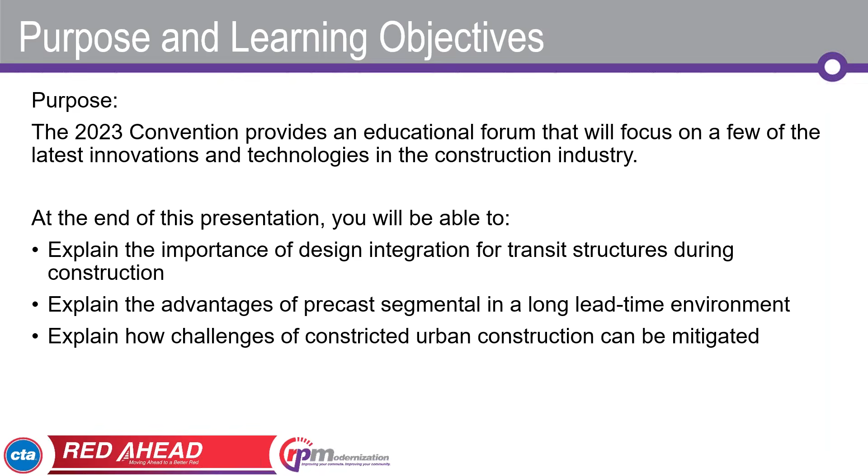A couple of general purpose ones. The purpose and learning objectives here as part of our CEP: design integration, advantages of precast segmental, and the challenges in a constricted urban environment. So keep that in mind. The next slide is just our CEP slide. And we're going to start with just a project overview, give you a little bit of context of what we're talking about and where.

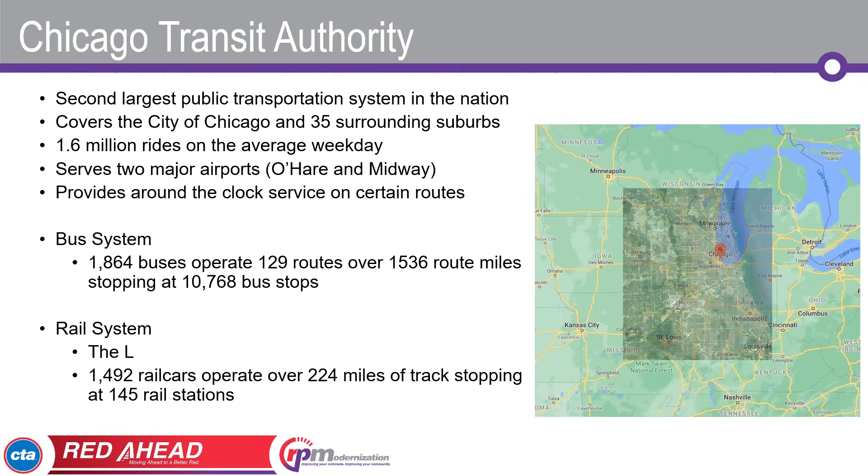So the project is in Chicago. The client is CTA, the Chicago Transit Authority. Kevin, show the system map if you click through. I think it shows a little close up and then a system map. There we go. So this is the system map of CTA's L system. So CTA operates all over and around the city of Chicago. It's a huge transit authority, 1.6 million rides on an average weekday. So lots and lots of people rely on the CTA to get them around town.

And an important bullet point there is it provides around-the-clock service on certain routes. So that is true of where we are talking about on the red and purple line. 24 hours a day, 7 days a week, never stops. They also operate a bus system, but what we're going to talk about is a project as part of the L. So the elevated mass transit system, sort of the famous, if you've ever been to Chicago and been downtown in the loop, the trains that are going overhead all the time. So almost 1,500 cars, 224 miles of track at 145 stations. Big operation, big part of the fabric of the city of Chicago.

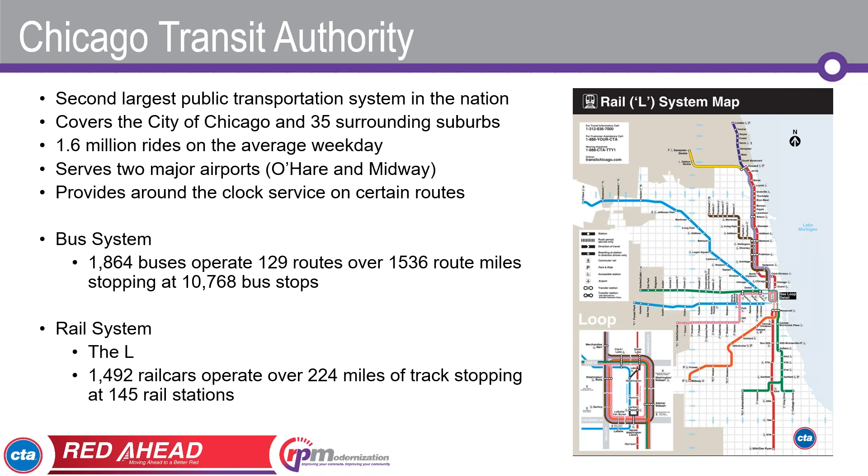Next slide. And we are working in the red and purple modernization. So it's a section of the system on the north side of Chicago, affecting the red and purple, and in fact, the brown lines to some extent. Big undertaking that affects almost 10 miles of the red and purple lines. It includes all kinds of updates, both structural, that we're going to touch on more here today, as well as system upgrades along this corridor. So big project, the biggest capital project in CTA history to date. A lot of people putting their time and energy and effort into this. Next slide.

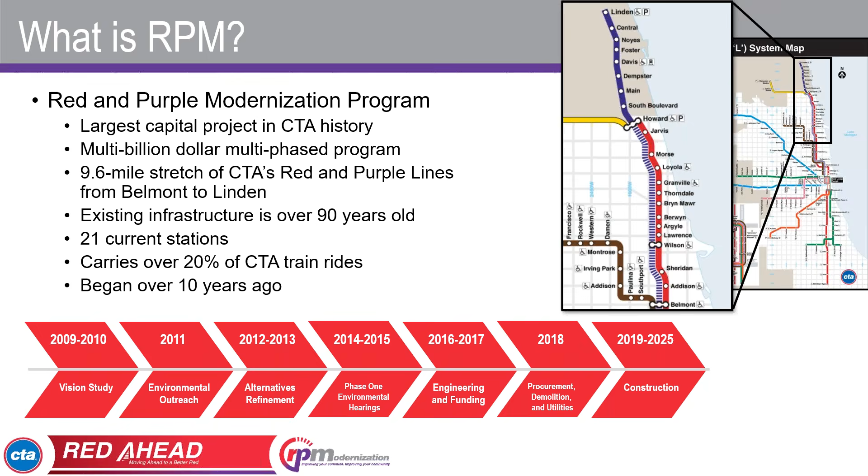So the two real areas of focus for structural changes, structural improvements. The first is the one that we're going to be talking about, the LBMM to the north there. It stands for Lawrence to Bryn Mawr Modernization. So it encompasses those 4 stations, Lawrence, Argyle, Berwyn, and Bryn Mawr. So it's on the north side, and it's about 1.5 miles of track that's getting redone there. We'll take a look at that in detail.

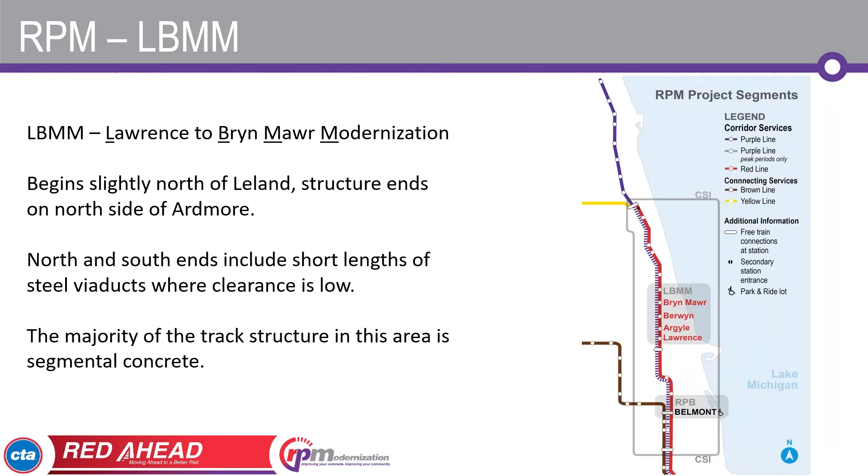The other part, and we'll just talk about it briefly, is to the south, the RPB section. And there's a quick slide on that. The next slide. So this is a good view of the RPB, just to give credit to everyone that's worked on that and our colleagues. So 2 big components to this.

There's the bypass, and you can see the old and the new side by side there. You can see how 2 of the tracks cut across the other tracks that are heading straight north. And in the past, they did it at the same grade. So every time a train was going to the Brown Line, which takes you to the left of this picture, traffic on the Red and Purple lines had to stop and wait. So the bypass that you see there goes over the top. That was designed by our colleagues at EXP.

And then everything to the north of there was in fact also reconstructed. This picture was before that happened. And that was all designed by Stantec, who was also the lead engineer for the entire project. Too many people to mention that contributed to this project, but those are some of the major parts and pieces of the structures there. So diving into our area, next slide.

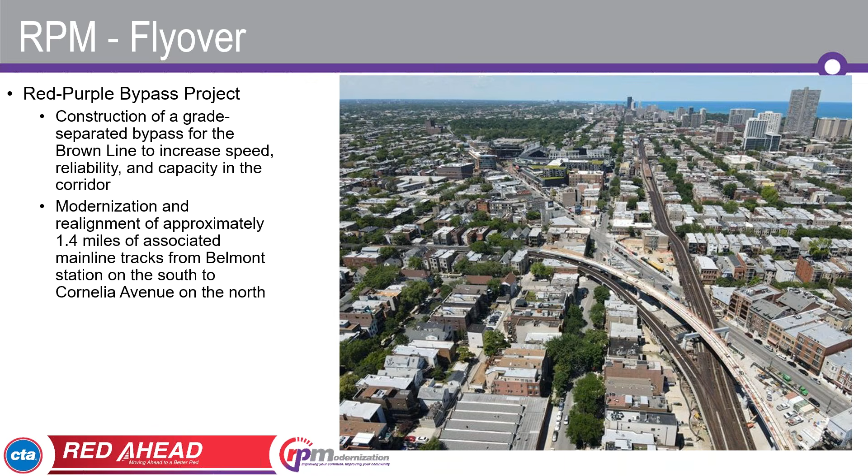So LBMM, this is the area that we're going to focus on here today. The alignment over to the right, and the first thing you notice about the alignment is that it's really not much of an alignment. It's pretty much straight as an arrow there. It is by far the simplest grade and alignment I have ever worked on. Very slight grades, 1% kind of undulating up and down, station to station. I think one curve at the north end that was somewhere in the 1,000+ radius. So, very simple alignment, and that was an important part of some of the decisions we made.

Over to the left, you can sort of see the story of what's going on here. So this part of the L system, there are 4 tracks. The Red and Purple lines are running next to each other. So to the right, on the east side, are the northbound tracks. To the left are 2 southbound tracks. And in broad strokes, you can think of the inner tracks as the local train. That's the Red Line that stops at every station. The outer tracks are the Purple Line. Those only stop at a few stations, and then once they get further north, provide service to the northern suburbs up there.

The original construction was on the embankment that you see there in the section. So it was an embankment with concrete retaining walls. That's been in service for about 100 years. It is getting replaced by a viaduct structure. So the alignment is moving up, as you can see here. It's actually getting widened out a little bit, so more space in between the tracks, and replaced with a modern viaduct structure. So the old is the embankment, the new are the 2 segmental box girders you see there in section.

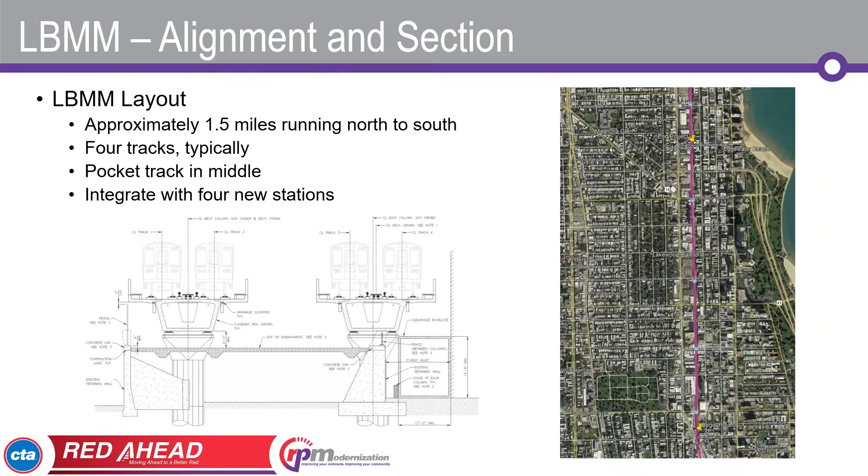The next slide shows that in one location we have a pocket track. This is on the order of 1,000 feet long. So a 5th track running down the middle with connections to the tracks on either side. So you can use it for train storage, reverse direction, that kind of thing. And what we did to accommodate that track was a third box girder in between the typical two, connected with cast-in-place closure pours on either side. Looks a little lopsided, and that had to do with the space available for our staging. So those are the basic building blocks. And next slide here.

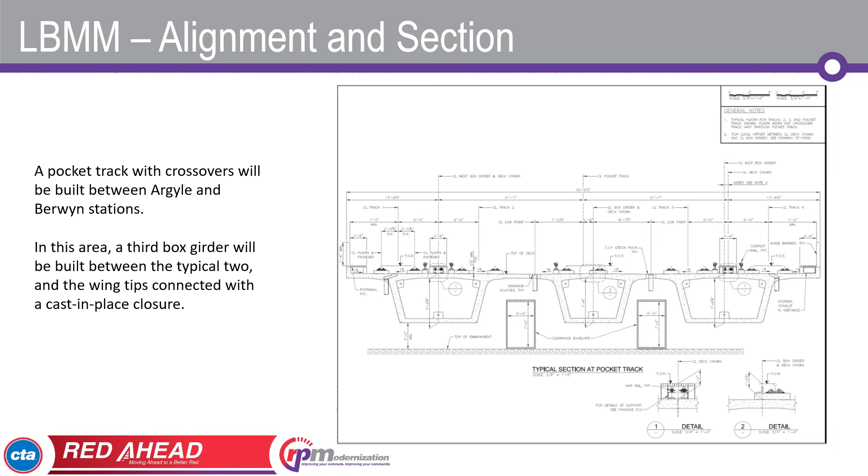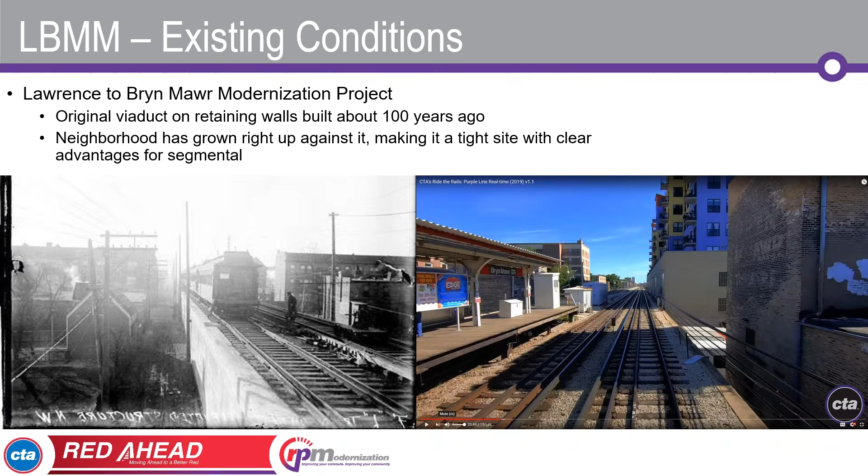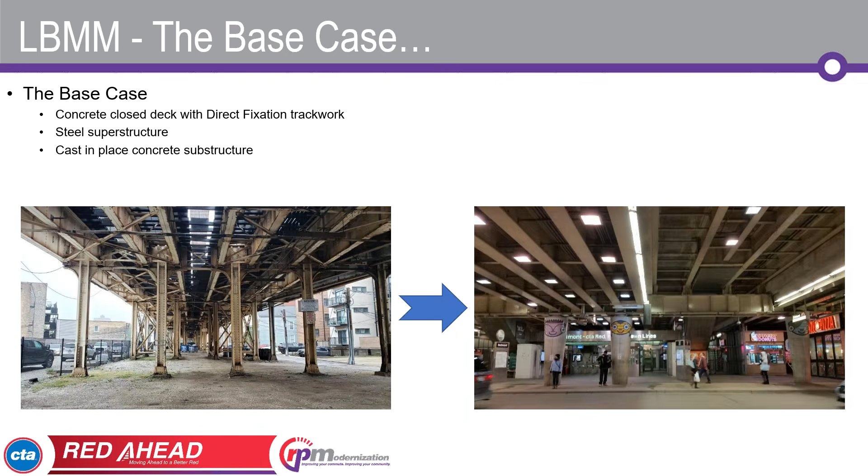It had advantages in that the spans were longer. A huge amount of the construction activity was pushed off-site into the precast yard. So again, being a good neighbor, segmental had a lot of good advantages there. And of course, low maintenance. You're not in there scraping paint off and looking for corrosion. So ultimately, that was accepted. That's what we progressed with, that ATC on segmental. And next slide.

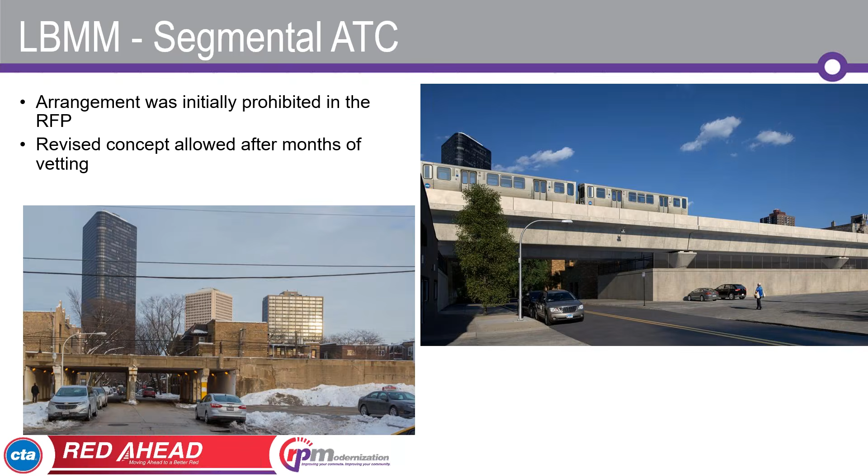We then switch traffic once everything is assembled over there. So all the trains are running north and south on the east side. That's where we stand today. And erection starts on the west side. That is stage B. So just a little context for some of the terminology you're likely to hear.

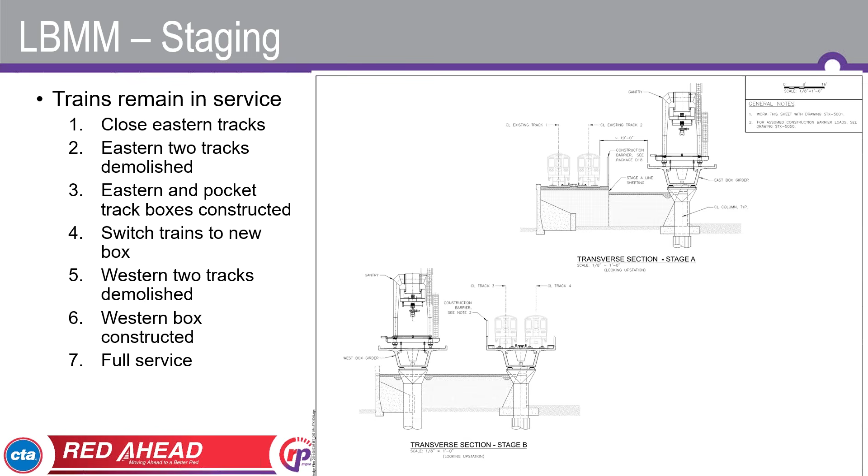We did have some variation in the span length, which we achieved. We used 120, 110, and 100-foot spans. The only difference is we took out the kind of boring segments there in the middle to give us those different spans. Everything on the alignment is one of those 3 things, a simple span of one of those 3 lengths. So a very simple structure, very repetitive structure. I mean, that's exactly what you want out of a project like this. Do a simple thing and do it over and over and over.

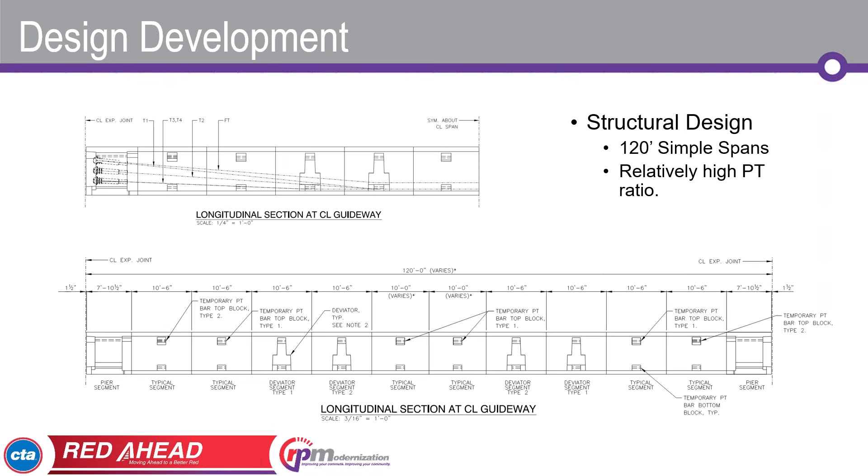But on the next slide, for a construction engineer, that leaves you without a whole lot to think about. Simple spans, they're called simple for a reason, pretty easy to analyze, pretty easy to figure out. We do have some pretty heavy loads. We are storing segments on the deck. We are using a segment transporter to bring them along the alignment. It's a congested area. We have to use the alignment for a lot of the delivery. And of course, there's the truss, but those are fairly easy to analyze.

The only thing that really is at all tricky and takes a lot of coordination with the contractor team is the transverse positioning of some of these big loads. Those wheels were pretty well prescribed to where they could be, and we had special cases, maybe where we had an opening for a stairwell at a station or something like that, where it took a little bit of care and engineering to get through. So there you go. That's the construction engineering.

Now, if we weren't spending a lot of time analyzing a complex structure, what did Kevin give us all this money for? That's a good question. He's probably wondering that right now.

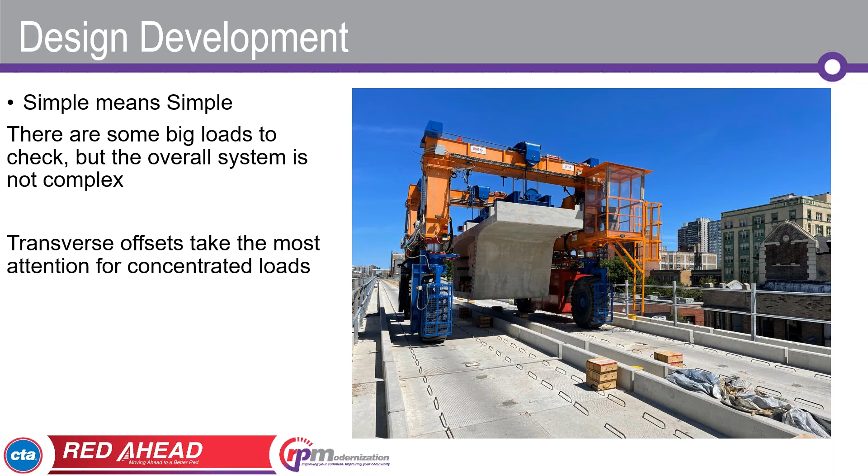Next slide. Oh, whoops. Sorry, I forgot that I wanted to talk about the gantry a little bit. So this gantry, if you look at it, probably looks a little unusual. You're used to seeing something with a bit of a wider base, maybe some articulation. But this gantry was really custom designed and created for this project. Deal is the gantry supplier. And you can see there's a single box beam that supports everything. Most of the time you're used to seeing two.

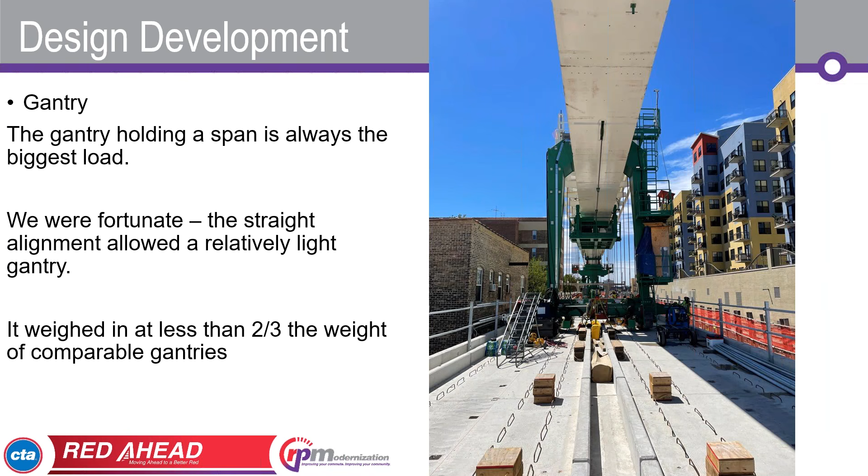Okay, if I didn't spend my time doing calculations of structures, what did we do? Well, an awful lot of it was integration. Transit structures by their nature have a lot of stuff compared to roadways. And Chicago is probably exhibit A for that, in that it is a 100-plus-year-old legacy system. You are working with systems that have been developed over time. Some of them may have had their design origins decades ago. So there are a lot of things that you need to accommodate, from the signals that you can see here to the signaling system, to the switches to move you from one track to the other, to the third rail, to everything that powers that, to the communications. There are just lots and lots of things that need to get incorporated in this structure.

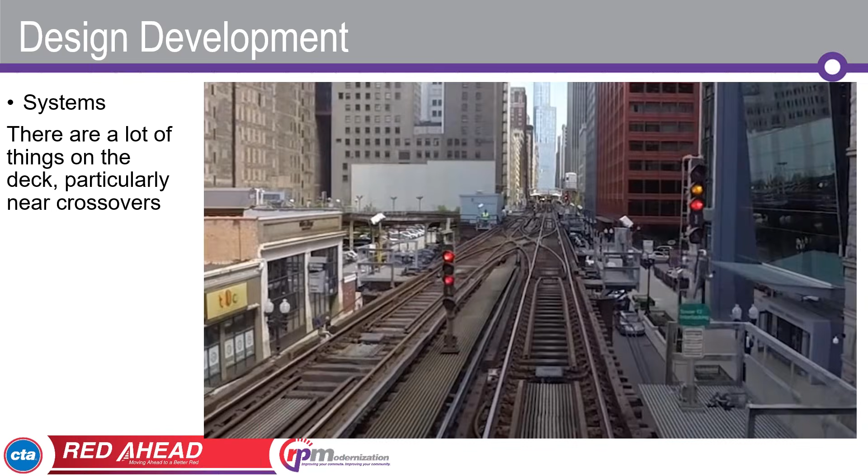This is particularly true somewhere like this. This is a shot downtown in the Loop, at a crossover like this. The next slide. So all of those things, of course, need to be connected. In addition to the stuff on top, lots of metal boxes, lots of things with electricity that as a structural engineer I'm kind of afraid of, they all get connected. So there are cables running every which way, and those things need to be coordinated.

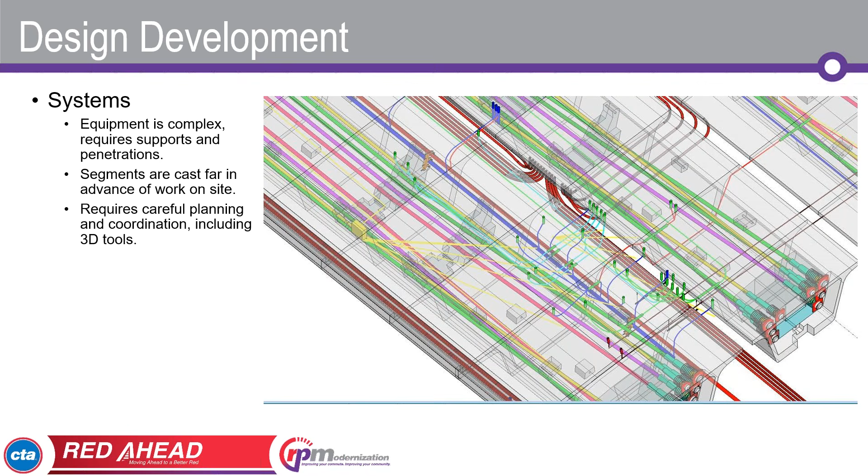So there's a big job on the designer side of figuring out where everything goes, coordinating the locations of all the penetrations, all the supports, all the inserts that you need to hold these things up, making sure that cables aren't hitting each other, really planning out where all of this hardware goes, and making sure that all of the things that you need to load up the segment with is planned out, coordinated, and well understood, well in advance of erecting it or putting in any of this conduit. So what does that end up with from a construction engineer's point of view? A good example is on the next page.

So this is a map. This is one span. I wouldn't go so far as to say it was a typical span. This is a fairly congested area, in the vicinity of one of those switches. But there's a lot going on here. You can see that even the legend of what all these little circles and X's and squiggles mean takes up half the page.

There's a lot of stuff to incorporate on here, and all of it needs to be planned out, coordinated with the systems folks, with the track folks, and embedded into a segment, sometimes a year or 2 years ahead of when it might get erected and connected to all of this stuff. So the planning effort is a big effort. A lot of thought and a lot of communication has to go into how these things fit together and where they all go, but it really pays off.

Kevin can speak to that, but we had very few calls from installers saying, hey, we don't have a sleeve, we don't have an insert. It came together fairly well. So it's a lot of effort to get people to pay attention to it so far in advance, but absolutely worth it at the end of the day.

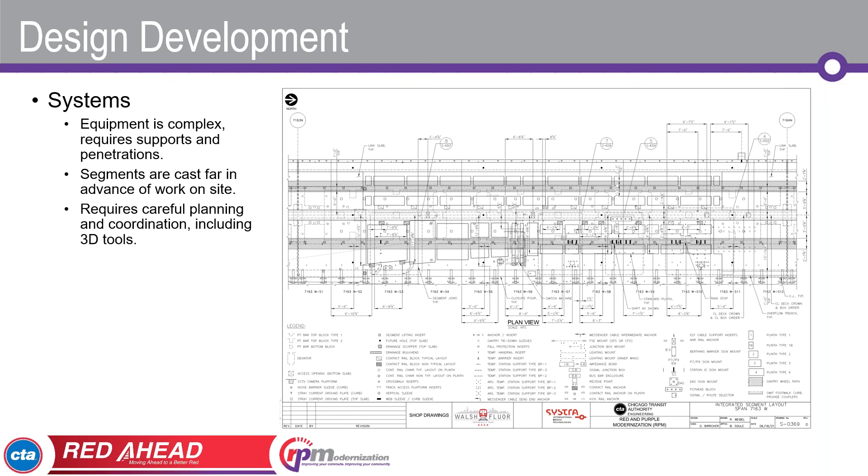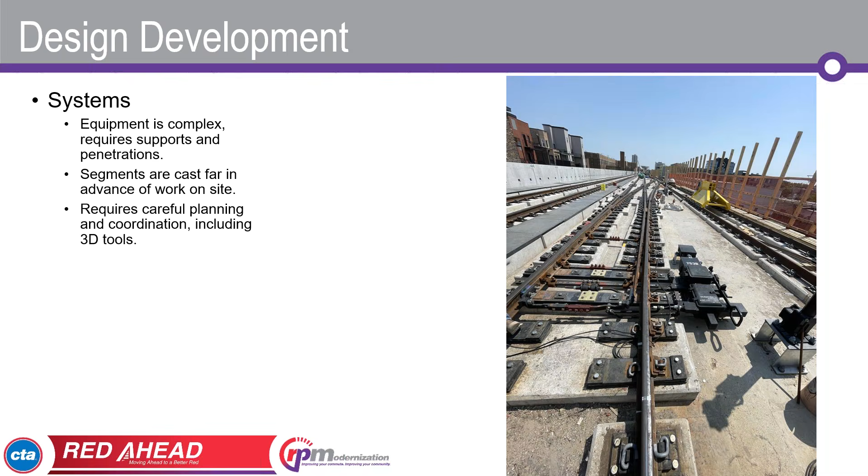A big part of the construction engineer's job is integrating all of that stuff. So that's not just figuring out where the duct needs to be, it's also coming up with revised details. Where do you, if you have to cut a bar, what do you do? How do you show equivalence? And not just integrating all the systems things, but drainage.

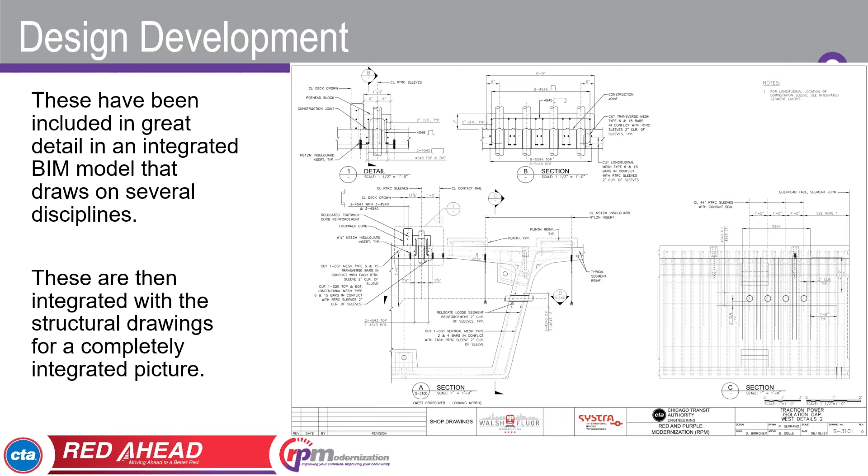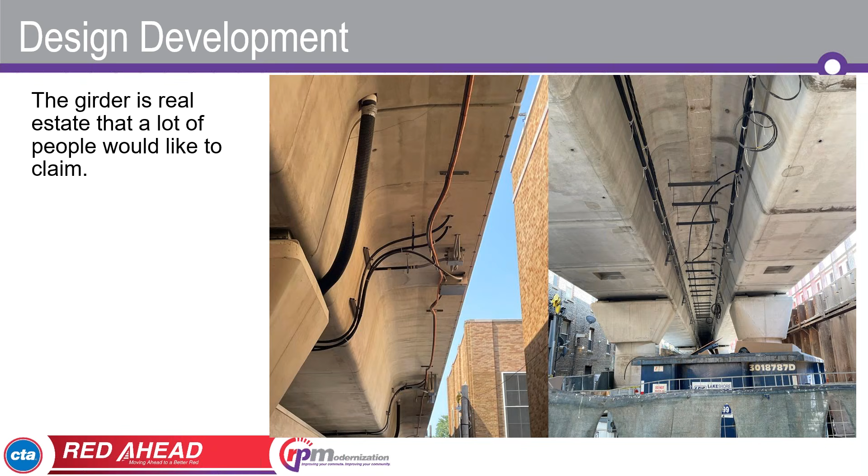The other thing that took a surprising amount of time, if we jump to the next slide, is rail installation.

I wouldn't say this is exactly a pet peeve of mine, but it is a pet concern. It's something that gets overlooked a lot by the structural engineer, the contractor, and the rail installer, and it really shouldn't. In my career, I've gotten a lot of phone calls about projects around the world where they say, hey, why are the bearings sliding off? What's going on here? Almost always related to this. It does lead to real world problems and it deserves a lot of attention.

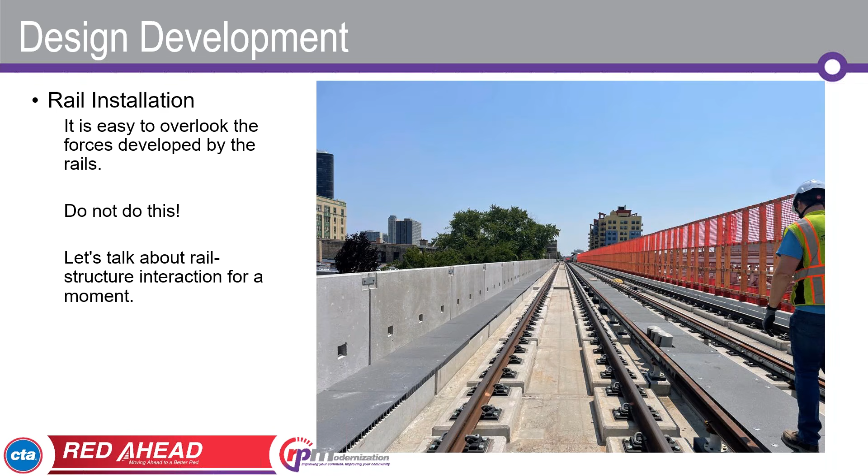So this is rail installation. And to understand the issues with rail installation, I'm going to take a brief detour to talk about rail structure interaction. Next slide.

Most modern train systems use what's called continuously welded rail. That means the pieces of rail are laid out and welded together to create one long continuous piece of steel. When I say long, it can be several miles long. So what does that mean in practice? Well, it effectively doesn't move. So when the temperatures go up and down, it doesn't expand and contract. The rail just sits there, doesn't really move much.

Instead of getting longer and shorter, it gets stresses. So the rail, say when it heats up, it wants to expand. It doesn't move, it's compressed. When it cools down, it does the opposite - it would like to shrink, it's restrained, so it develops tension. The bridge, on the other hand, is doing the opposite. It is expanding and contracting. It has an expansion joint, in our case, every 120 feet.

So you've got this long ribbon of steel that's not moving, connected to a big rigid piece of concrete that is moving. How do those work together? How do you manage that? Well, you manage it with what you see here, which are the fasteners - called slip fasteners. They restrain the movement of the bridge relative to the rail, however you care to think of it, up to a certain force. At that force, they slip. It's a manageable force, and your average everyday force that you can generate from this on simple spans, you have to consider it, but it's not that big of a deal.

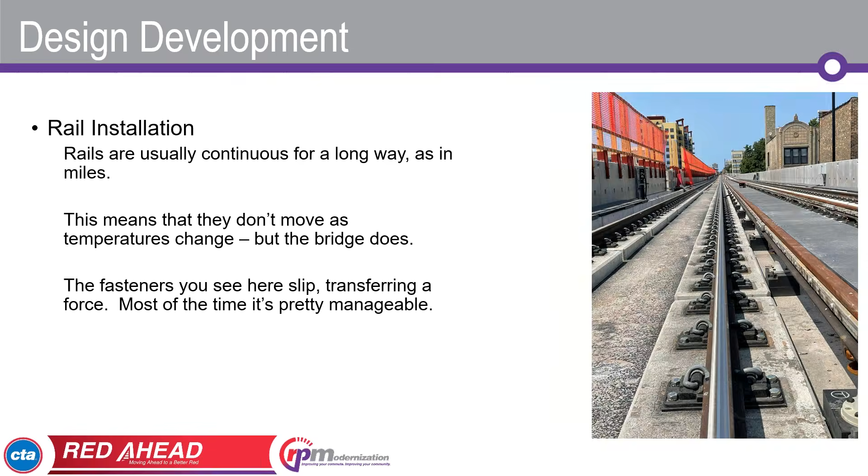This is a force you really have to pay attention to. You have to make sure you have a good load path to get it into your superstructure, to your substructure, and down into the ground. A completely different order of magnitude. Where do you find these?

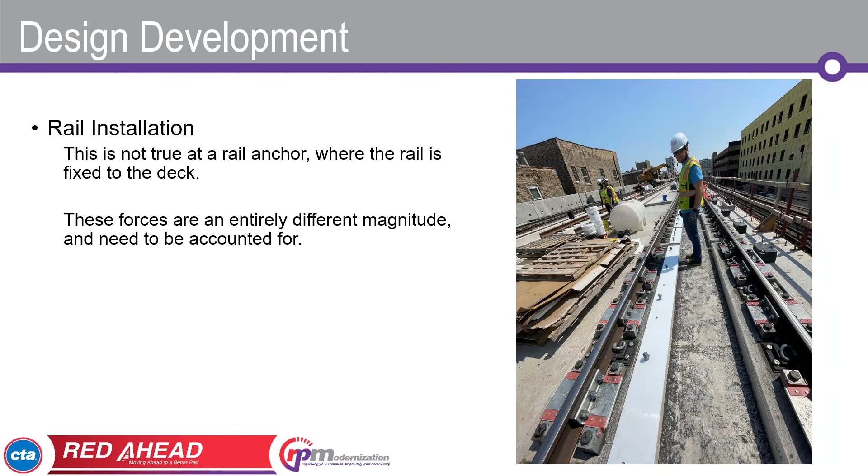Next slide. You find them in really two types of places. Whenever you change structure type, so if you have a long span structure next to simple spans and a big expansion joint, a rail expansion joint, you have to have anchors near those to hold the rail steady. You will also have it if you change from a closed deck to a ballasted deck.

And you especially have them where you have special track. All of these crossover type trackworks need to be held stationary relative to the bridge, so you have rail anchors associated with them. So you've got these places where you have rail terminations that are important to think about. And you also have to think about how rails are installed. I'm going to talk about that on the next slide here.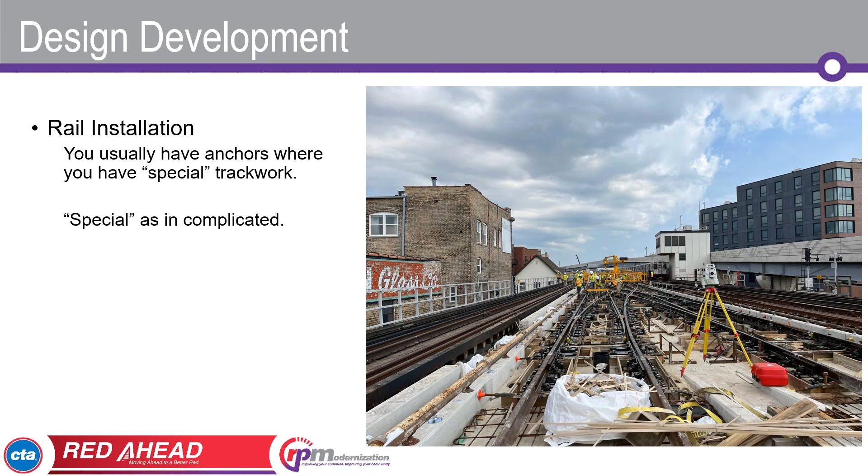So what's going on here? Well, we talked about how the rail develops stresses as it heats up and cools down. The rail feels different stresses. At some temperature, it has no stress, right? You're going through this cycle, and at some point it hits zero stress.

That temperature is not an accident. It's an engineered and prescribed number. In our case, it was 85 degrees. So whenever it's 85 degrees out, nominally the rail should have no stress in it. If you think about it, when you walk out onto the site holding a piece of rail and set it down, it has no stress in it. If it happens to be 85 degrees that day, super, attach it, perfect. That's exactly what you want: a no-stress condition at the right temperature.

So in a perfect world, we would erect all of the rail on a day when it's 85 degrees. We don't live in a perfect world, we live in Chicago, so most of the time it's colder than that. That means you're installing rail when it's say 40 degrees. That means you have to induce into the rail the stress it ought to have at 40 degrees—you have to put tension into it so that later on that year, when it warms up to 85 degrees, the stress goes to zero. That's what these guys are doing here.

They have a piece of rail that is locked on either side. It's attached with all the fasteners, and they are literally pulling it to induce that stress. They set a gap in the rail at the right distance to stretch it out to match that stress, then use this hydraulic puller to pull the ends together, do the weld, and let go. So as you are installing rail, most of the time you are stressing it, inducing a force into the rail. That's important to recognize, because that force is significant when it comes to transferring it down to the ground.

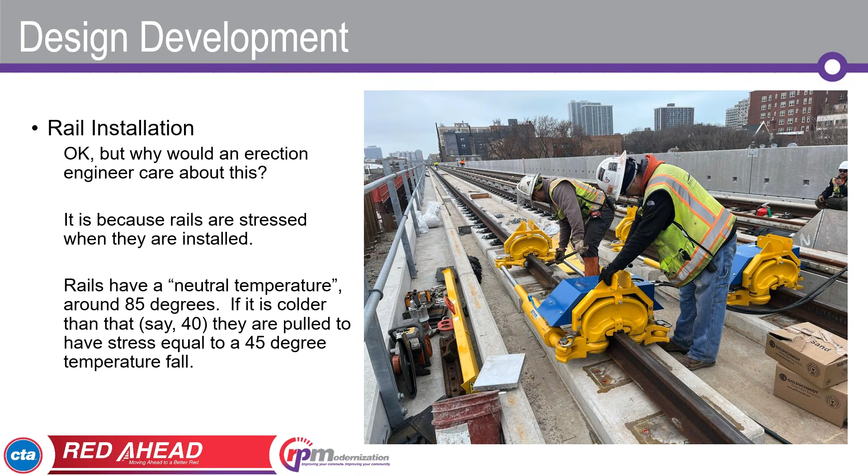Next slide. So I talked about how rail anchors are big concentrated forces. The same is true with rail terminations. If you just stop the rail without installing an anchor at the end point, you still get that big force transfer—all the force in the rail transfers to the structure. It's a little spread out because it engages a bunch of fasteners, but it's still a big force that has to make its way to the ground, in particular through the connection from the superstructure to the substructure. A lot of times that's where the trouble is.

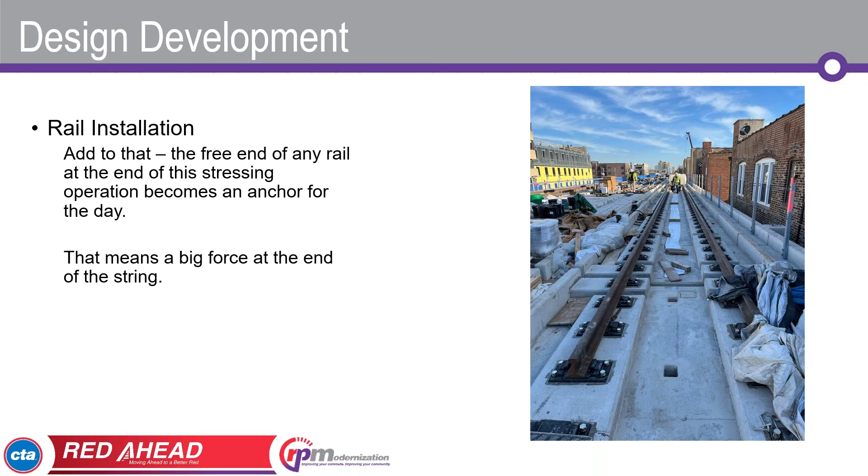If you're working with elastomeric bearings and say you have a gap for expansion, that force will close the gap. It'll pull the span over, pull your bearings over, whatever the case. It may overload the shear capacity of a fixed bearing, or overload a shear. It's something you have to know you're doing, something you have to pay attention to and watch out for. What we ended up with is this.

So what are we looking at here? This is a map of the entire alignment. The north end is in the bottom right, the south end is in the top left, and the different colors are the strings, the literal pieces of rail that Walsh was installing out there. Each color means a new piece.

What we did was we worked with the rail installation team. We figured out comfortable places for them to stop work, to stop welding things, stop pulling things. Those are the yellow zones. Those areas were specifically designed for those forces. We blocked off the shear keys to prevent movement. We checked everything to make sure. In a couple of cases, we had to upsize a few things. And we had sort of safe zones where they could stop work.

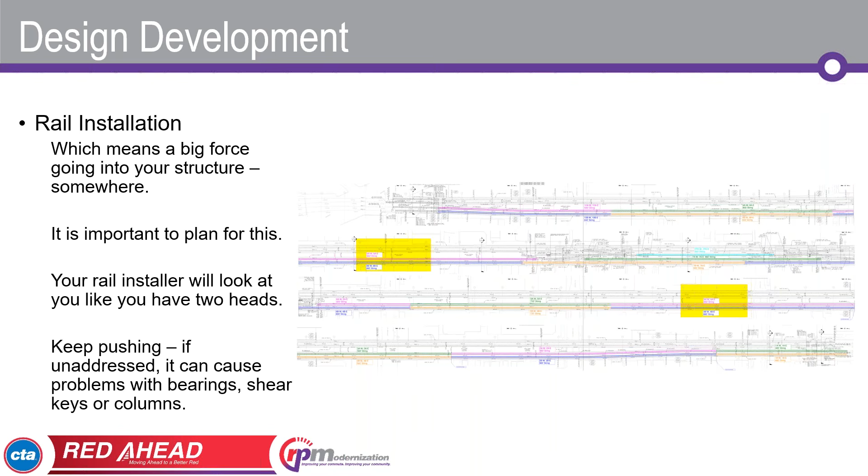And we're going to do the exact same thing when we go through and install the rails on the other side. So message for everybody here, your rail installer is going to think you are crazy if you bring this up, but it's important. I've seen a lot of projects that get pulled off of the bearings, things like that, because this isn't being addressed. So rail installation, important deal. I'll hop off my soapbox now and hand the soapbox over to Kevin, who's going to talk a little bit about construction and the progress they've made.

Excellent. All right. Thank you very much, Ben. As he said, I'm going to talk through some of the construction sequences. So for those of you who have seen us at ASBI, some of this goes back to the beginning of stage A, but I think it's worth sharing again. So I'm going to go through some of the construction in stage A and then leading up to where we're at right now. So in the beginning, the pictures that we've got on the screen right now, just putting the gantry together.

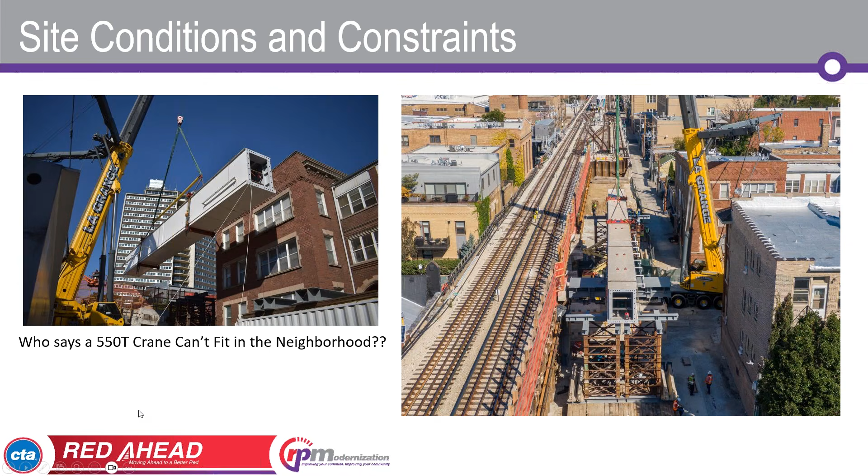And on the right you can see us working on the east alignment, tracks 3 and 4. Like Ben said, we took those out of service for that 1.5 mile stretch, and then put the trains on tracks 1 and 2 on the left side of that picture. And then we erected that gantry right here on a small cross street called Ardmore Avenue, using a 550-ton crane to get the structural elements in position. And then we actually used some specialty equipment to get it moved into location. So we'll go into that in a couple minutes.

But prior to the superstructure work beginning, in the beginning of the project, Ben alluded to the embankment that was supporting the existing tracks, and the original plan was for those embankment walls to be cut back at the cross streets to create ramps, so we had access up on top. But at the end of the project, these embankment walls would stay in place just to serve more or less as fences for the area, but they don't serve any structural purpose for the bridge. The bridge is designed to obviously not require the existing retaining walls and embankment to support the structure.

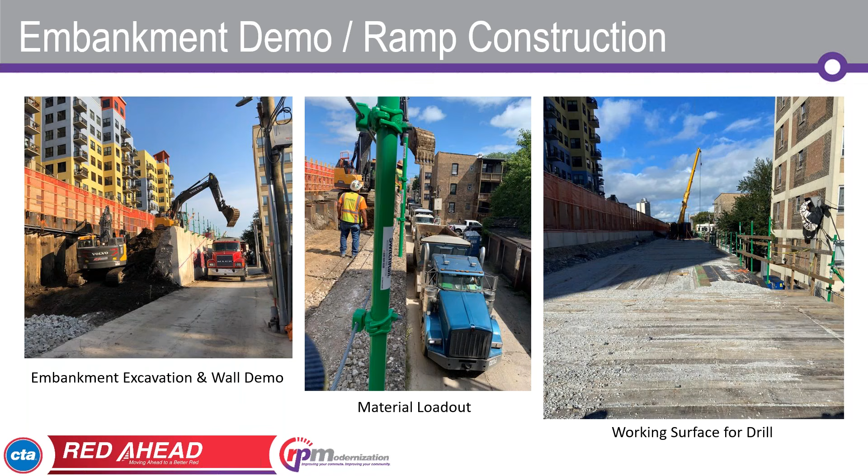So in the beginning, you can see just our logistics and the site constraints. We've got the excavator in the middle, the 2 left pictures, unloading the ballast and the embankment material into dump trucks that are lined up in the alley. And then moving out, and then at the end of our initial prep phase on each block, you can see the crane mats, and there's some pockets there where the future shafts will be installed. So this is how we build stage A from up above.

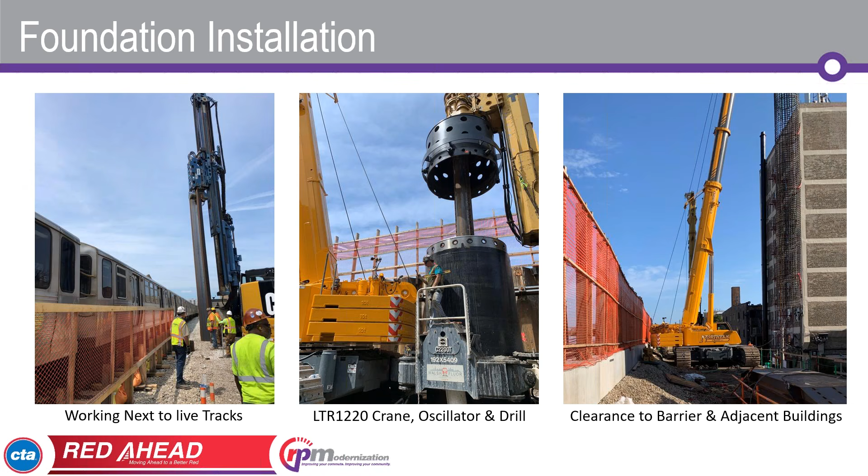We tripped it from the south side of that crane, swung it around 180 degrees to the hole. You can see he's boomed up tight, about 6 inches away from the temporary barrier that separates us from the trains, and also about 6 inches away from that building in the background. Those were just day-to-day site constraints we dealt with in the beginning in Stage A.

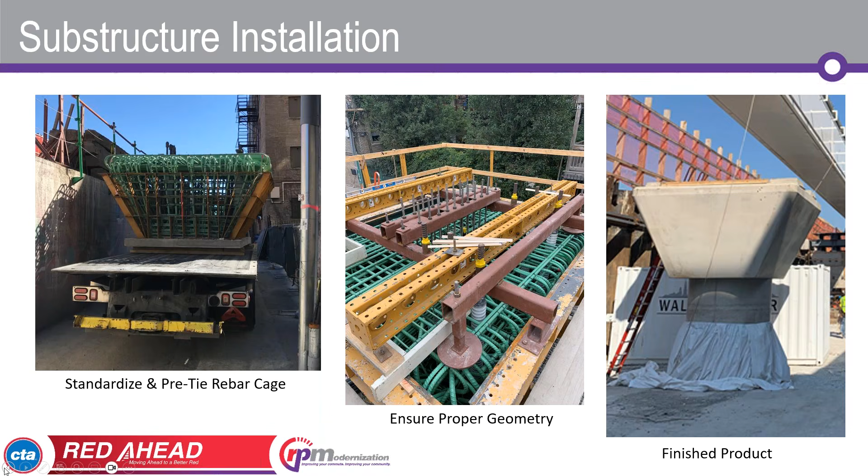Going through the erection equipment at a high level - I know Ben spoke about it already - what makes this job unique, especially in Stage A, is the only option we had to get segments here was from the back, because it's so tight and there are only a couple select cross streets we can utilize to deliver the segments. We didn't really have the opportunity to get segments underneath the gantry where you can pull them right off the truck. Everything had to be delivered utilizing a transporter from behind. That's also the logic on that portal frame on a rear support, so you can get the segment from behind through the rear support and out to hang. Obviously that's not the most efficient method, and ideally if our site constraints were less than what we're actually dealing with, we wouldn't be doing it like this. But it's a great solution given the circumstances.

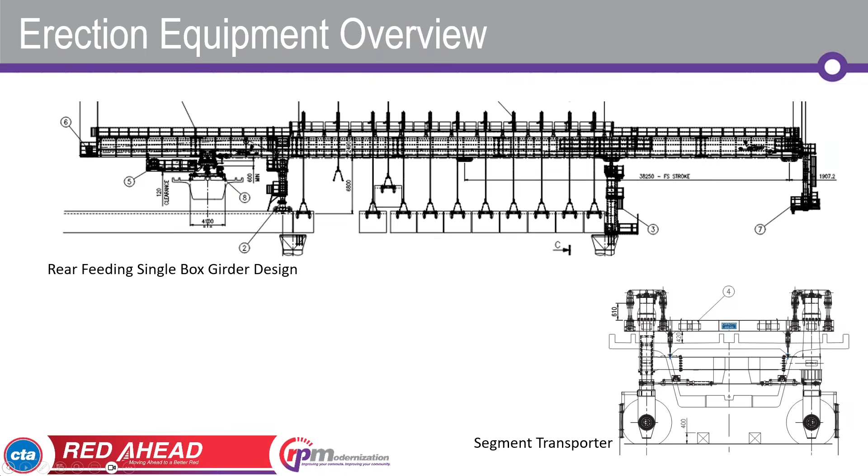Now I'm going to go into a little more detail on the initial assembly of the gantry in Stage A. Going through the steps, we had a temporary pier bracket up on the end pier, and temporary falsework across the street. Then you can see that 550-ton crane in the street setting the sections of the main girder - the gantry is about 285 feet long, so roughly 7 40-foot sections.

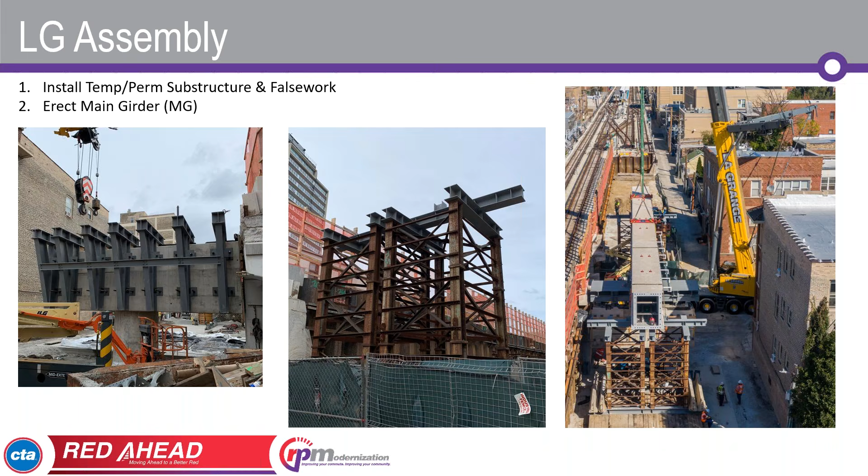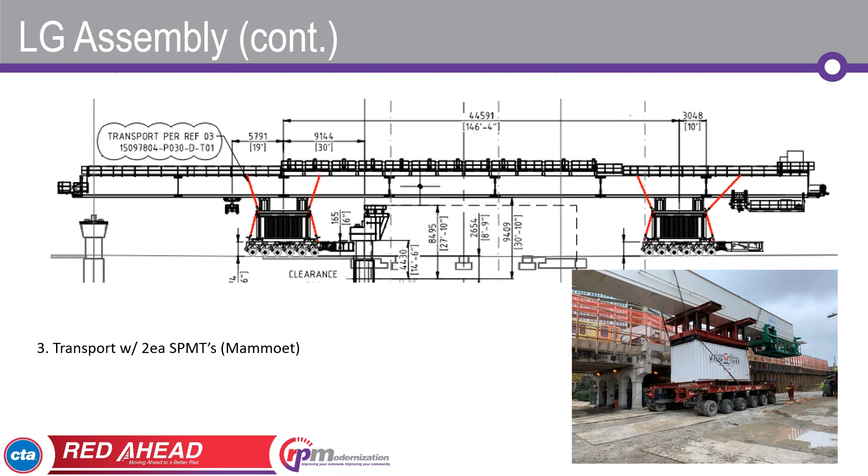Once the main girder is assembled - really just the main girder assembled and then the winch underneath - the next step was to bring the Mammoet in. We supported the main girder, removed the falsework, and then utilized SPMTs to relocate the 285-foot main girder to the south to get it onto the segmental spans, because on this particular cross street we're transitioning and tying back into the existing alignment. So we didn't have the same depth availability, and it's a steel superstructure, closed deck superstructure. Clearances are much less and the piers are in much tighter space. In order to access that with our crane in the main street, we could only reach so far to the south, so we had to build that main girder over the street and then relocate it with SPMTs.

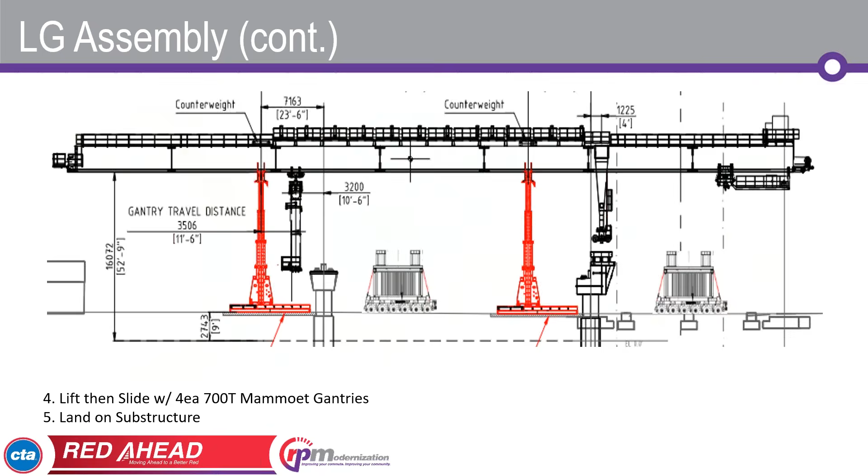Let's see, I think it's in the next picture. I'm going to skip ahead one.

Oh, I'm sorry, I'm going backwards.

In the final step, once we lifted the main girder up to clear that pier cap, the Mammoet gantries are actually on a tracking system. So we had to pull those gantries, travel them forward, and then land that rear support on top of that pier bracket. So now we have the fully assembled gantry up on, I don't want to say flimsy, but pretty tight towers. We had very light wind requirements. We had a beautiful day and it worked out just fine.

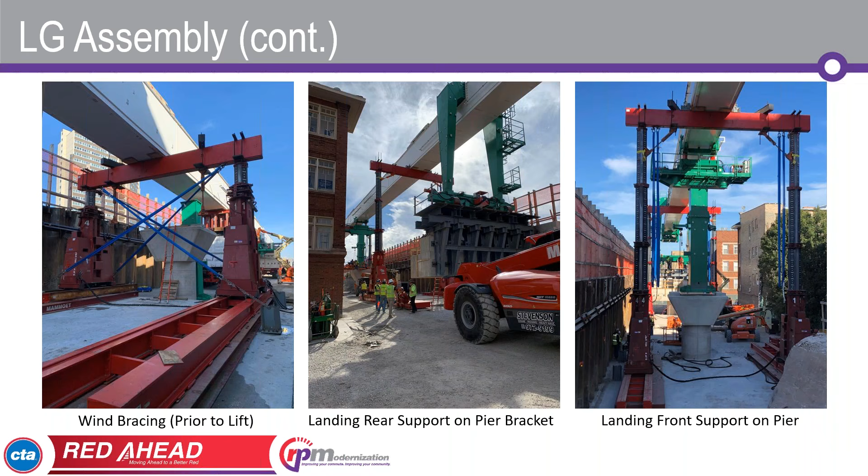But we transferred it, moved it longitudinally to the south, and then landed on the pier. And then at that point, once we anchored it down to the substructure, we were able to finish up the assembly and then start segmental erection. So just a couple pictures.

Typical span erection. We got the segments coming to the rear, and in this case, you can see the low boy in the street, and we picked that first span up directly with the winch, and then brought it through the rear support out to the main span, and then hang everything, get the deflection out of the truss, and then going backwards again, and then proceeding with the assembly of that span, and then launching to the next span.

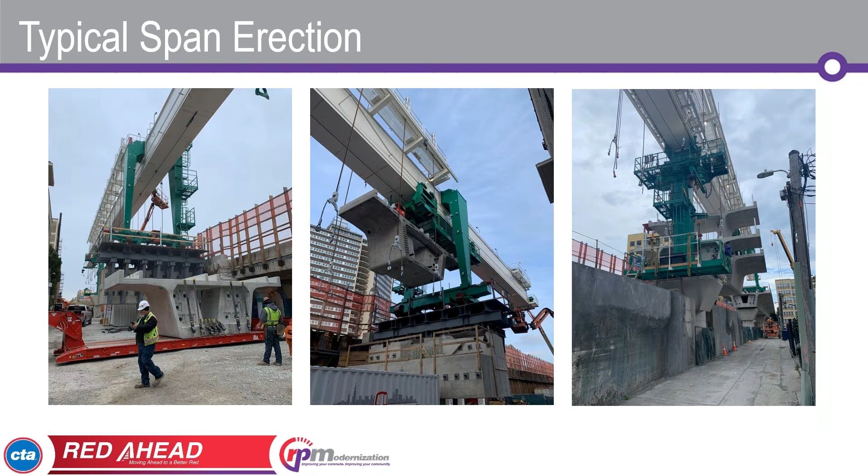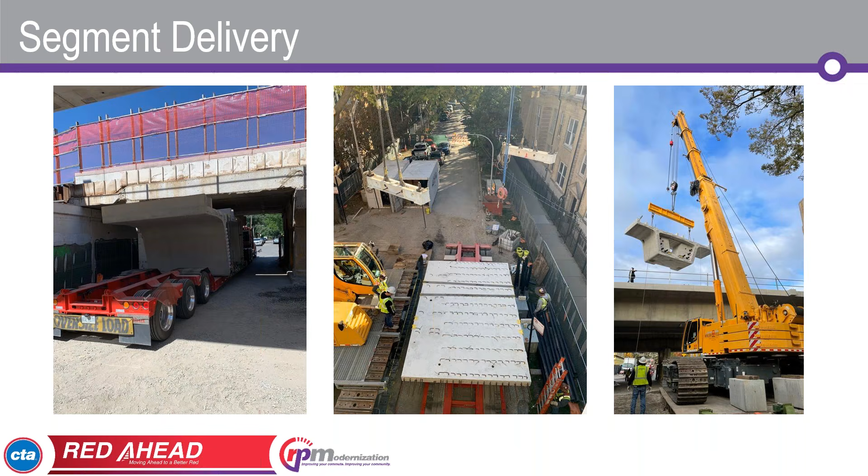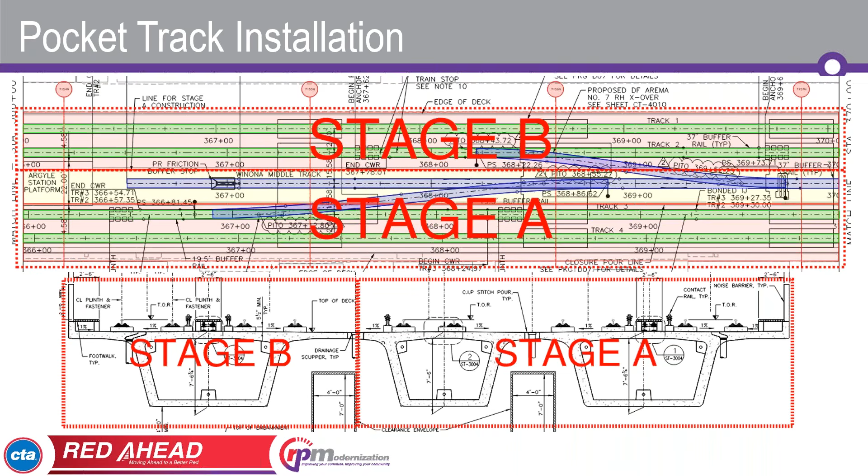And then the pocket track erection sequence consisted of typical span erection with the gantry. The pocket track segments were detailed slightly differently to accommodate the same spread on the lifting points. So we just went right through the flange instead of into the web because the webs are a little bit narrower here.

So we assembled the span with the gantry on the east alignment, so that gantry never side shifted. It was always on the east alignment. So we assembled the span, and then we had some low profile beams that we were able to set across

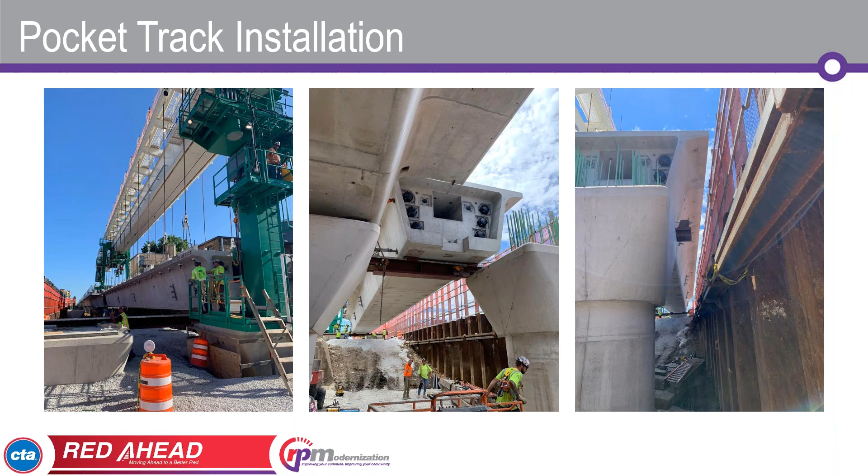between the 2 piers, and just using a simple strand jack and obviously some stainless and PTFE, so a smooth sliding surface, pull that span right over, and then installed temporary jacks, lifted it up, pulled the beams out, and set it on shims, and then proceeded with erection of the east span in that same area.

And through the pocket track area, like Ben was alluding to, and some of the snips he had from the model, it's quite congested here. There's a lot going on with the crossovers and subsequently all the systems and signal equipment. So these couple shots are looking in that zone, in that pocket track area.

On the left, you can see what's going to be an opening, and there's some big concrete blocks that are hanging to handle that eccentricity because that wing is clipped off from the east box to accommodate a temporary opening for what you can see in the third picture, to get people up those stairs to the deck level to get onto the platform.

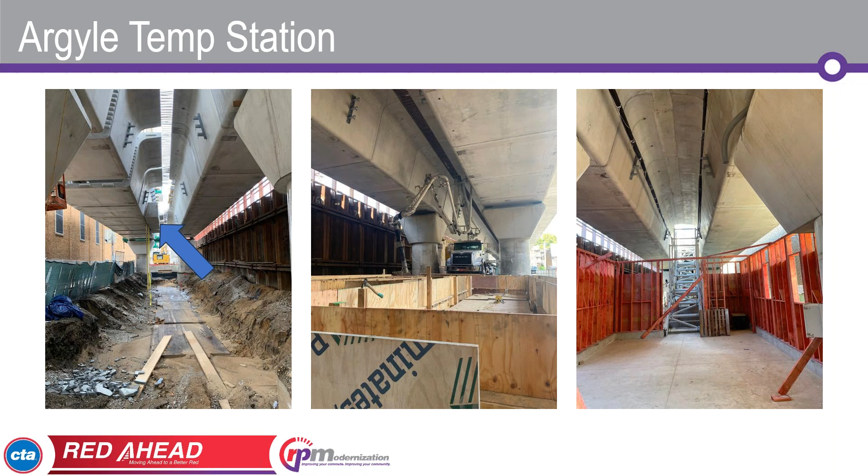And the middle picture is just, I thought, kind of funny. It's a 20-meter pump, but to be able to pour some of the temp station walls and footings that we have in the picture there, we had to work underneath the bridge and unfold that boom with almost no clearance at all, but that's just how it works here. It's quite tight.

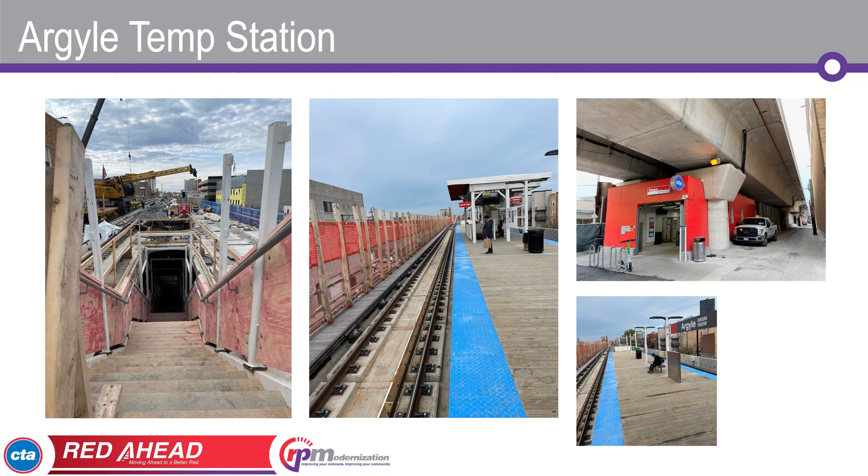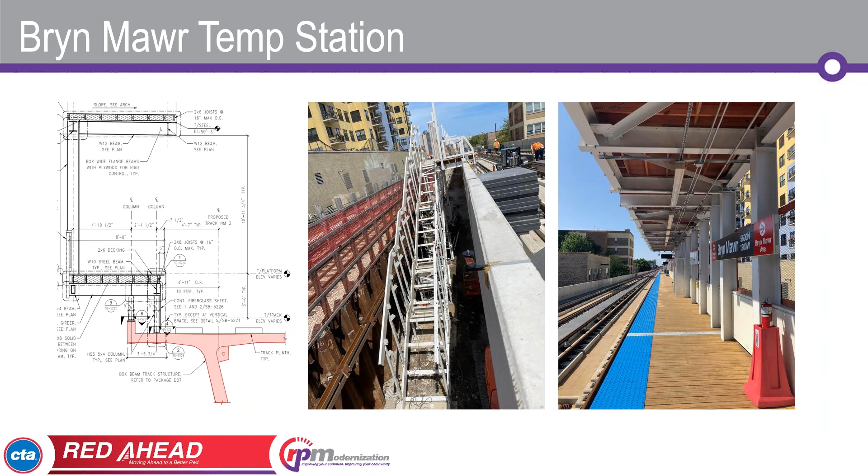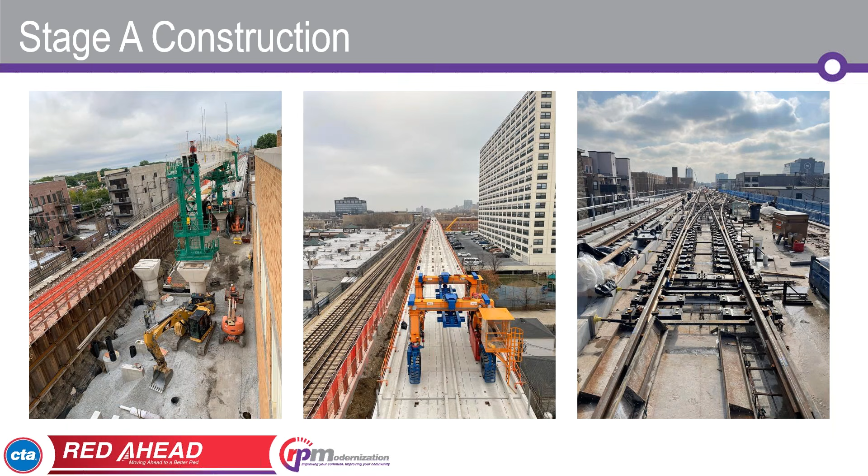In the middle, you can see the picture of the transporter and just the previous alignment, a little bit of curvature there, but very gradual. And then on the far right is prepping for some of those crossover pours in the pocket track area.

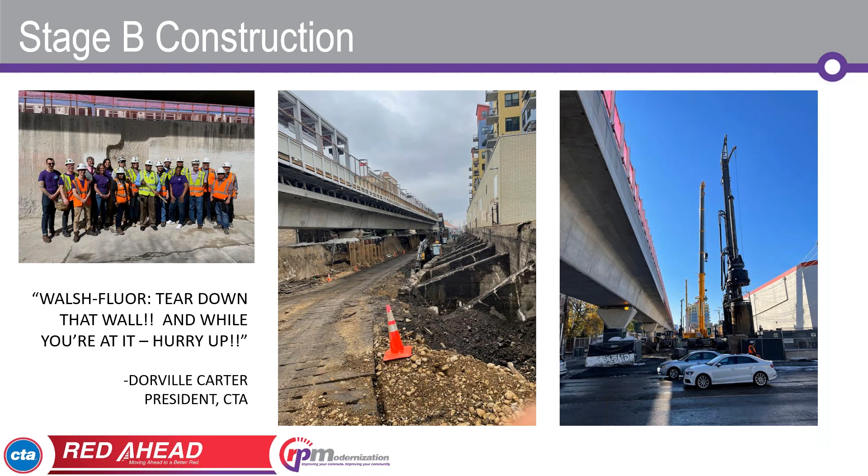So you can see in the middle picture, that's just once we've excavated a lot of the embankment, you can see some of the existing wall. This is a cellular wall on the west side, typically, and then a gravity wall on the east side, typically. But that's what it looks like after we removed a lot of it. And then on the far right is a picture standing up at the north end looking south, you can see the crane and the drill, and it's a night and day difference from a construction perspective to be able to work at grade instead of up on top of that embankment, which was the original intent. So we've welcomed the change.

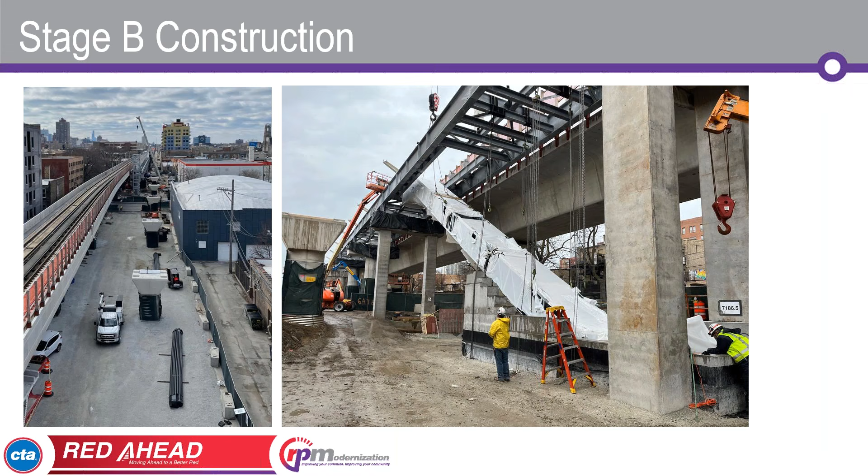And then just continuing through here on the left side, we can see some of the substructure. And one thing that I love to see is there's a mile of substructure, which means the gantry is not going to get slowed down by anything that needs to support it. So we are in the process right now actually crossing over one of the main streets, Bryn Mawr, and then a week after next, we'll turn into double shift and start accelerating the superstructure to get down to the south end. And on the right-hand side, it's a picture of the Bryn Mawr station. You can see the temporary platform up above. You can see the east box that was erected in stage A that currently has trains running on it. And you can see the escalator truss installed. And then the gantry is not far away from here.

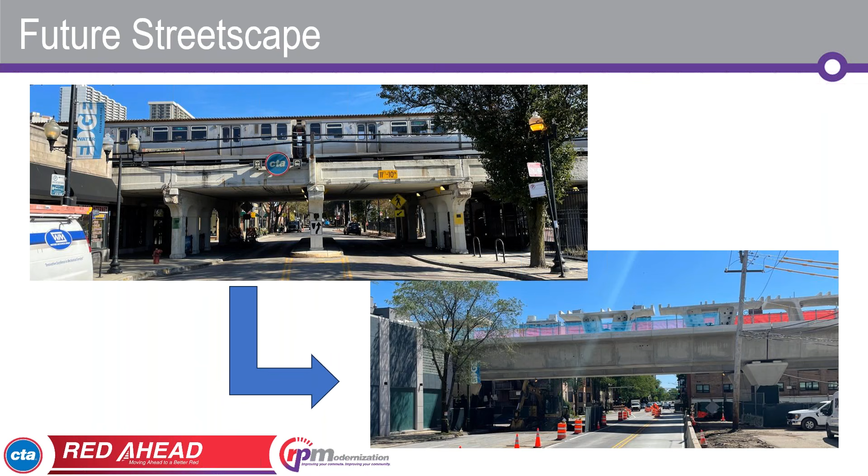On the bottom right, you can see this is Hollywood. You can see both of the boxes now erected over the street. And you can see the piers are pretty far offset from the street, and there's still a lot of work to do underneath. But at the end of the day, it opens it up significantly, and it will just create a better condition for everybody that's passing through, whether it's driving or on the sidewalk.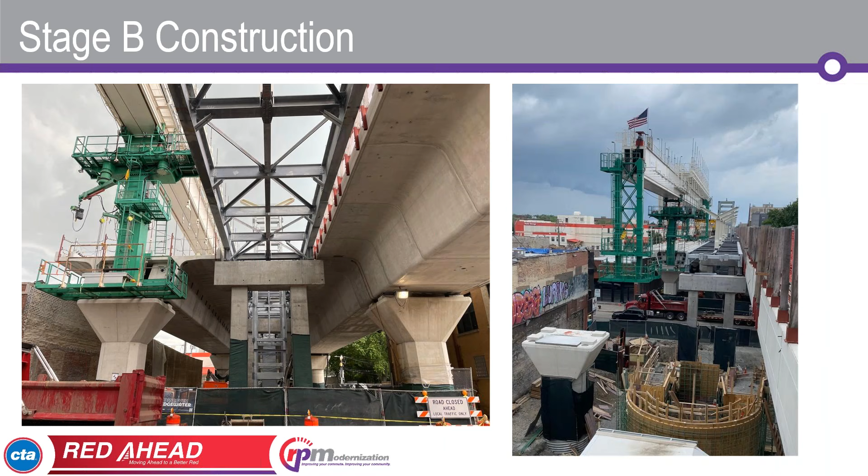So with that, I'm gonna ask if there's any questions. Thank you all very much, and I think the next year or two, as construction proceeds, we'll have more to share. Especially as we get to next May, which is when we'll be opening up the west box to train traffic, and then just getting into the finishing works. So again, thank you all very much.

And Wade, I'm gonna defer to you. Would you like me to read questions if there are any? No, we've got a bunch of questions. I'll just start firing them at you here. So let's get started.

Okay, Kevin, this one's a question for you. I'm going to read it word for word because I'm not sure I understand it. Why was the gantry not installed using the steel spans like stage B? And which was cheaper, installing the gantry using the steel spans or using the 550-ton gantry? I think it means crane. Yep. Yeah, that's a wonderful question. Sounds like that person is relatively familiar with the job.

So in stage A, early on, we made the decision to forego the erection of the steel girder bridge because in order to be running the bidirectional traffic on tracks 1 and 2, there was a lot of signal infrastructure upgrades that were required to be complete. The trains hadn't run backwards on those tracks before. So in order to prepare for stage A, we got ourselves into a situation where there was still a lot of signal work. So without delaying the entire project, we decided to push off the closed deck steel erection at the north end, build the gantry utilizing that 550-ton crane at Mammoet. And then once segmental had proceeded far enough down the alignment, we could come back in and install the closed deck bridge at the north end without impacting the critical path.